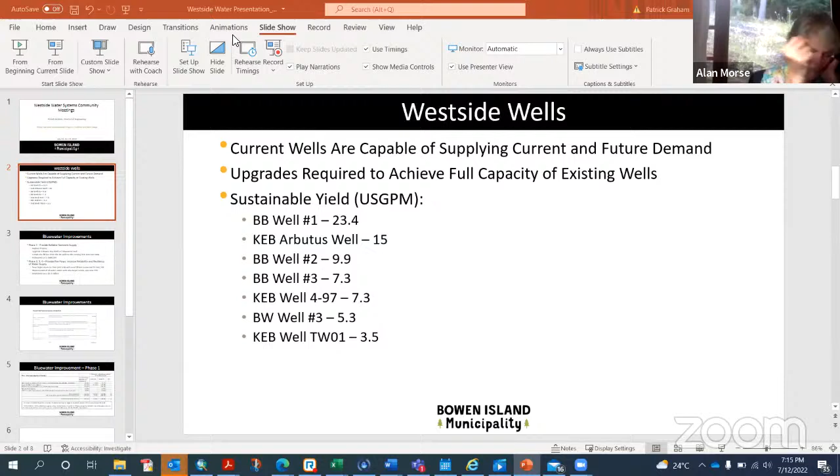You're still on mute, Patrick. Now. Okay, good.

So this is intended to summarize the water systems improvement project, to provide an update on where we're at and what the next steps are. So we have done some assessment of the aquifers on the west side and the water systems, and a lot of that's been discussed and presented with this group already. A key conclusion is that the current wells we have are capable of supplying current and future demand. Upgrades are required to achieve the full capacity of the existing wells.

So the scenario that we've looked at would use essentially the best wells throughout the Bowen Bay, King Edward Bay, and Bluewater systems, and have all of those wells pumped to a common reservoir, which would be the existing King Edward Bay reservoir. In future phases, we would get into a new reservoir in Bluewater. There will also be a new reservoir as part of the fourth phase of the Arbutus Ridge development.

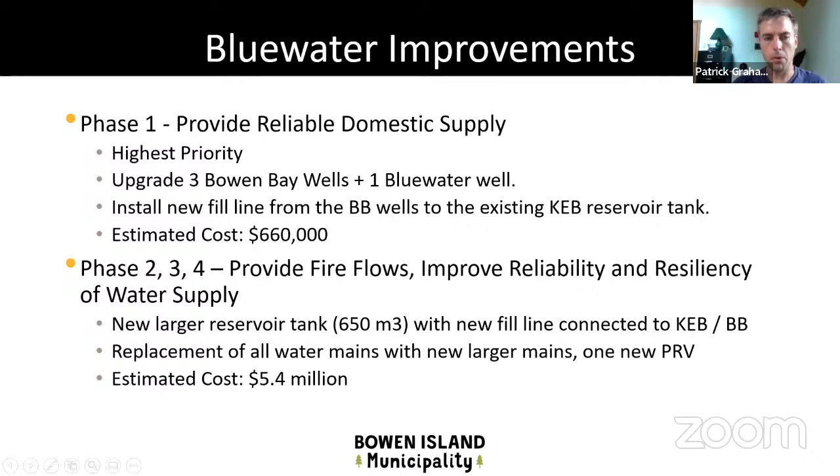So essentially, this is what was presented at the last budget review, the 5-year plan. Things have been escalated because things have been pushed out. We were looking at 2021 cost estimates previously, and now we're looking at 2023. Essentially, the first phase is addressing the domestic supply by upgrading the wells, and then the subsequent phases involve water main replacement and reservoir construction primarily.

Talking about $6 million can be scary for people. Talking about $660,000 is something that we can more easily wrap our heads around, and hopefully get some agreement to borrow the necessary money to proceed with that next year.

The Arbutus Ridge well is one of the better wells, and that coming online has bought us a bit of time. It is intended to cover the full supply requirements for all of the King Edward Bay development area to the east of Windjammer. So as that area gets built out, we need to have new supply addressed before that happens.

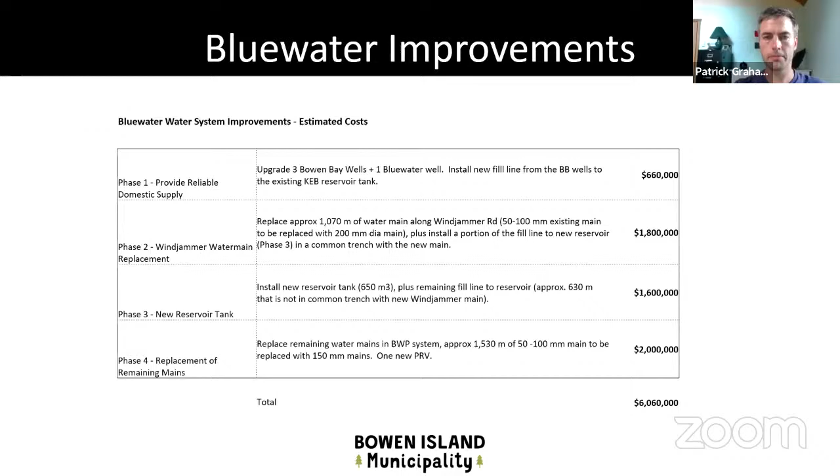And then, we never really got into much discussion about this. We did talk about this during those MOU discussions that we had over the past year. And I think the general agreement was that benefiting parties paying for infrastructure upgrades makes sense. And so essentially this project is driven by the need to address the Bluewater domestic supply gap. And as such, the bulk of that would be paid by the Bluewater system, through borrowing. I assume that the reserves aren't anywhere near enough to cover that.

There is some contribution from the Bowen Bay system, in that we're upgrading their wells. I just took a guess there, in terms of what's the net present value of those assets compared with the net present value as if they were new, right? So they're getting new pumps. They would say, well, we don't need those. Fair enough, but they do have a higher value and that should be captured. But I think the expectation that we've hopefully created previously, and is not a surprise to folks here, is that Bluewater would be covering the bulk of that cost.

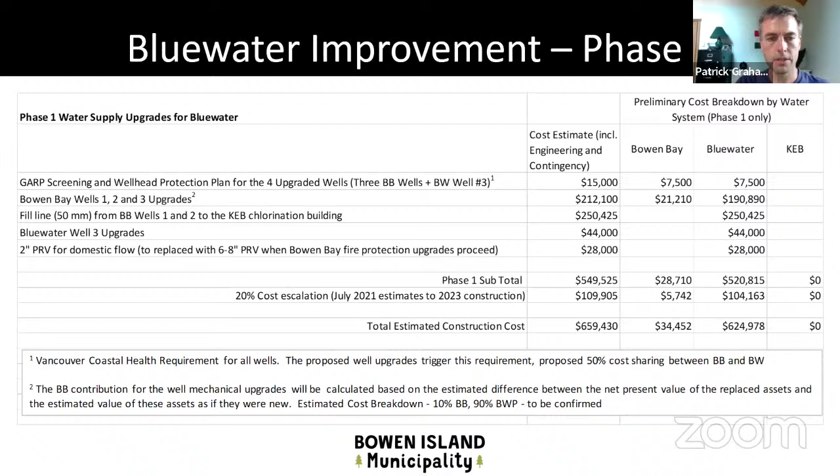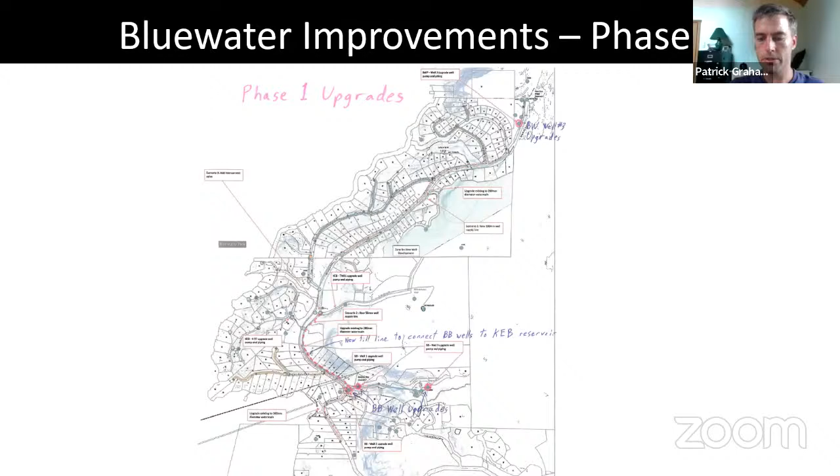And it's not shown on here, but in future there'd be a reservoir up here higher. And then the trick is, in terms of fire protection, getting that water up to the north end of the Bluewater system, and in future phases a new reservoir up here is the other recommended approach. So that's really the focus of what we'd like to get some agreement and approval to move forward with next year and to put in the budget for next year. Obviously we have to talk about financing options, but that would be my primary objective. I think ideally we would have a MOU in place. If we don't, we don't. I don't see that as being a showstopper to moving forward.

Yeah, so it's essentially well upgrades, and then phase two. Oh, sorry, this is Bowen Bay. Just to give a perspective on other system requirements, it's essentially operated as one system in the scenario I'm describing. So they would have the well upgrades we've already talked about, and then essentially they need to replace all of their water mains with larger mains in order to realize the benefit of fire protection that would come from being connected to the King Edward Bay Reservoir. If they're supplied from the King Edward Bay Reservoir, then they're not needing a new reservoir.

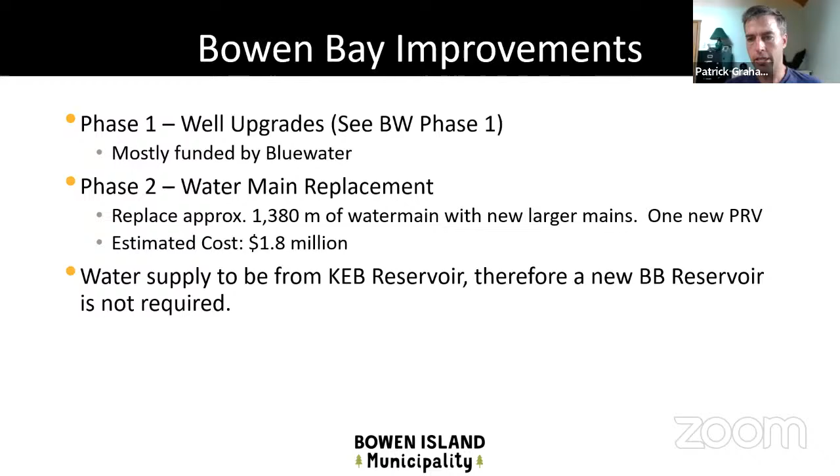Patrick, it looks like Jonathan's got a question. Oh, yeah, sorry. Jonathan? I don't know if it's appropriate now, but I'm not understanding, like, we've got lots of water now. I'm from Bluewater. We've been going fine for the last 15 years since we've hooked up with King Edward Bay. So why does there seem to be a need for all these upgrades? Our supply seems to be fine in the summer. We're talking 3 months in the summer, right? And it's been fine for 15 years. It's been fine.

I think there's been supply issues. No, there hasn't. There was an issue a couple of years ago. There was a big leak. That was the issue that 1 year. Up till then, there hasn't been. I've lived here for a long time, so I know exactly whether there's been a supply issue or not. So I'm sorry, I don't understand the idea of spending all this money for supply, when we seem to be going along fine, and now it's probably going to be better with this new Arbutus Ridge well.

Okay, well, I don't think that's the message we were getting from the LAC members that are representing this community. They've expressed pretty clearly throughout our meetings that they are very concerned about supply. And the King Edward Bay. So I mean, essentially the supply has been keeping up because you're getting most of your water from King Edward Bay.

Perfect. Okay, thanks. So I will speak first a little bit about consumption, and then I'll go into water rates a little bit. So my analysis focused on the metered consumption as measured last summer. So last summer, in 2021, average daily summer household consumption was 96 gallons per household per day. And for an average household, we use a figure of about 2.5 persons per household. So that means that on average, per person use in Bluewater is about 38.4 imperial gallons per day.

And when you compare that against the provincial average, the average for most people across the province in BC is about 69 imperial gallons per day. And I took that data from the BC Municipal Water Survey that was taken in 2016 and undertaken by UBC.

How does that compare to other Bowen Island communities? I've only been working so far on the 3 west side. I can give you the information for the other west side. Be curious. Yeah, I will. I'll have to print out my other presentation. Sure, I can get it for you, Kristen. King Edward Bay is 104 per household, and Bowen Bay is 116 per household. So take those numbers, divide by 2.5 to get to the per person average. So I've just done the 3. I haven't quite done any analysis of the remaining water systems on the east side yet. You're going to have to watch the next 2 days worth of presentations, Kristen, to get the rest of the information. No, the other systems, the Eagle Cliff and Cove Bay. Yeah, no, I'm not there yet.

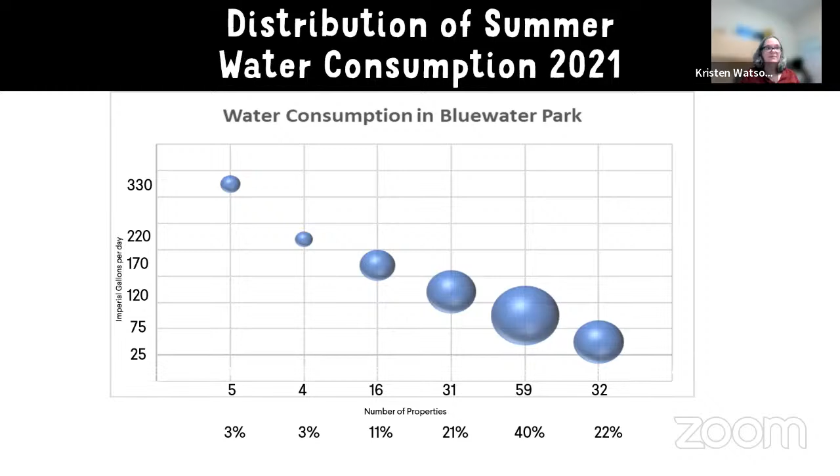So on average, a person in Bluewater is using about 55% of the provincial daily per capita use. So I think it's fair for us to say that residents in Bluewater are extremely careful when it comes to water use. And to show you on a distribution what that looks like, we have about 5 properties that are using around 330 imperial gallons per day. There are 4 homes that are using about 220 gallons per day. 16 are using about 170 per day. 31 are using about 120 per day. And by far the biggest number of homes are consuming about that 75 gallons per day number. And then we have about 32 properties that are consuming about 25 gallons per day. So very low usage on that one.

And the user rate across the 3 districts, we have a unified rate. It's the same rate that is being charged to Bowen Bay, King Edward Bay, and Bluewater Park systems. It says that it's a metered rate system, but because the flat rate allocation is so generous, most properties are using well below that threshold. So most people are paying a flat rate of $960 per year, and that gives them an allotment of 7,200 gallons per month. That equates to 240 gallons per day. In 2021, there were 6 properties that used in excess of that 240 gallon per day number, and they incurred metered rate charges. So 4% of all of the revenue was collected through the metered rates, and 96% of the revenue came from the flat rates.

So in total, we collected 151,547, and that figure was shared among all of the connected properties equally. And 6,827 was paid by the highest 6 users. So you can really see the bulk of the revenue is just distributed equally among each property through a flat rate system. And effectively, the current rate structure impacts everyone: those who use the least are subsidizing those who use the most. We believe that conservation principles should be embedded into the rate structure. So we've devised a new rate structure that will achieve fairness and equity, and at the same time promote conservation of the resource.

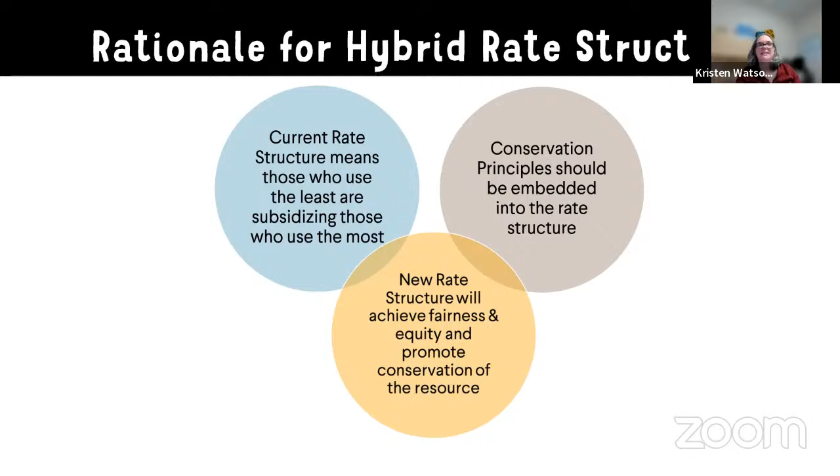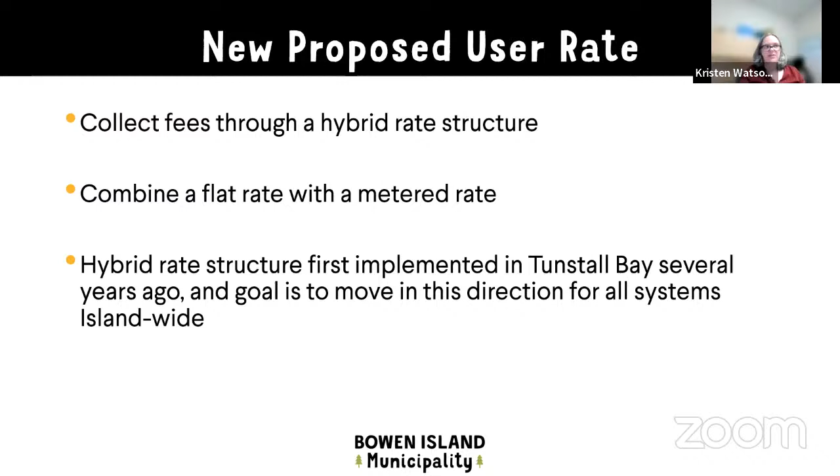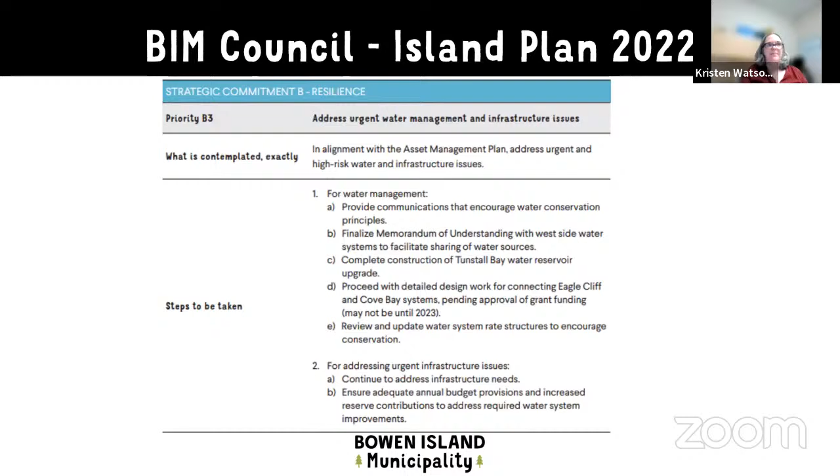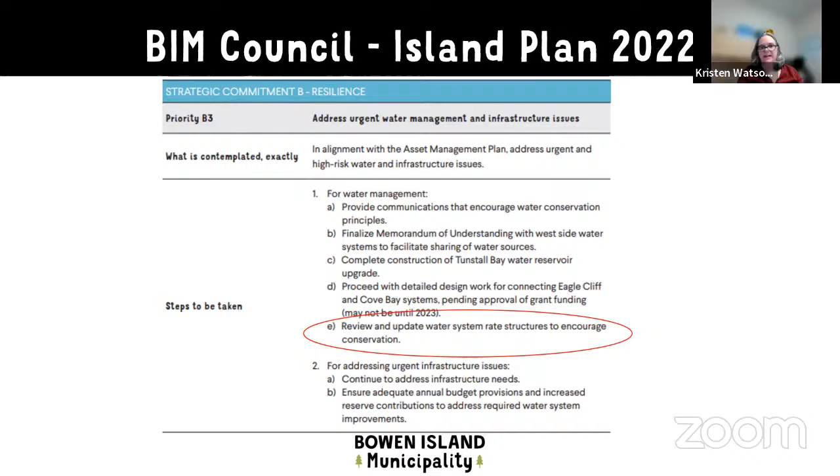We propose that we collect fees through a new hybrid rate structure. We'd like to combine a true flat rate with a true metered rate. And we've moved to this model in Tunstall Bay. It's a hybrid rate structure. It's been there for several years now. And our goal is to move in this direction for all systems island-wide. We're doing this to achieve fairness through an equitable collection of fees from all users, shifting it to a user pay principle to encourage water conservation, and align at the same time with council's strategic priorities. Council has identified their strategic priorities in their island plan. And specifically, they have directed staff to review and update water system rate structures, which will encourage conservation.

So this proposed rate that we've developed is a flat rate of $175 per quarter, and then start charging metered rates for every gallon of water used. So we would get rid of that initial allotment. And up to 4,500 gallons would be charged at ½ cent per gallon.

The next 2,500, and that's consumption around the range of between 50 and 76 gallons per day, would be charged at 0.0075 per gallon. The following 2,000 gallons, and that's for a range between 77 to 99 gallons per day, at 1.25 cents per gallon. And anything over 9,000, equating to about 100 gallons per day, would be charged at 2 cents per gallon.

And again, just to remind you that in Bluewater, the average household is consuming at about 96 gallons per day, and that's in the summer. And we expect that that summer usage is probably the highest at any point in the year. So we do anticipate that we would continue to do monthly meter readings throughout the summer to identify potential leaks. We would continue our practice of notifying all of the high water usage to any residents to enable us to pick up leaks and identify suspected leaks.

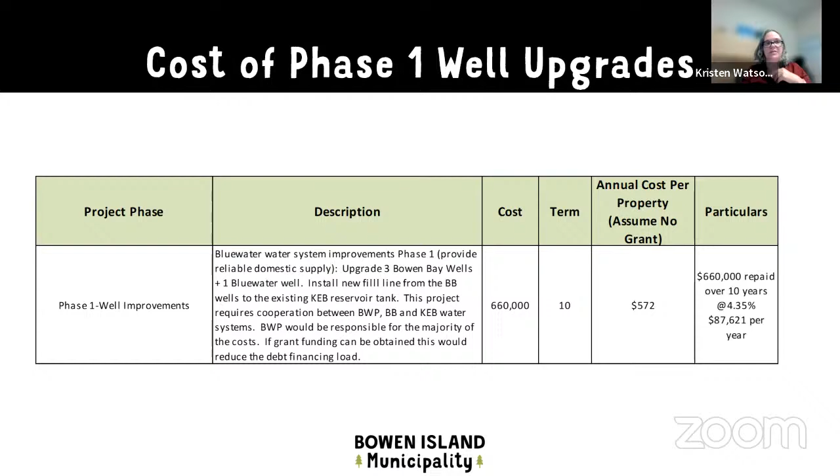The balance of the project we know is the water main replacement and upgrades and reservoir. And as Patrick indicated, the cost for that would be in the order of magnitude of just over $5 million. And there are several different annual costs to finance those amounts if they were borrowed. I assumed a term of 30 years for each of those, and they range from about $693 to $866 for the cost of financing a capital project with that price tag.

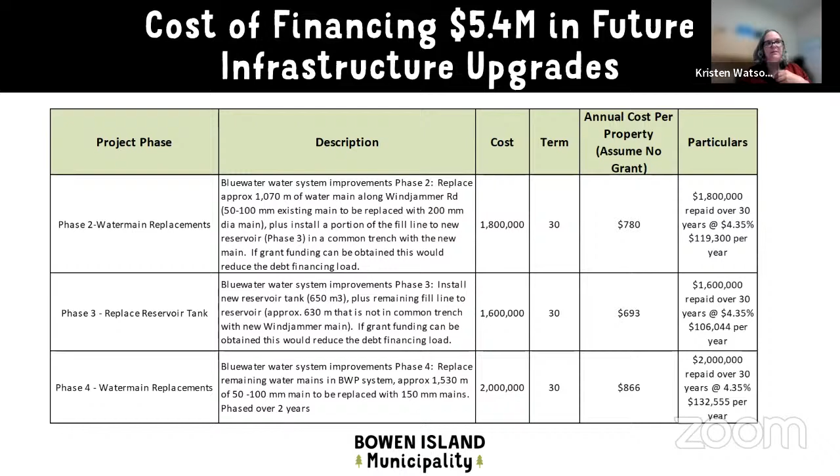So without grant financing, we know that this cost is going to be very high. And tonight we are looking for feedback from the community to inform what decisions should be made about moving forward with these projects. Specifically, what are the community's priorities? Is it safe potable drinking water? Is there a priority for fire protection? That is going to need to be communicated from the community members themselves.

I'd specifically like some feedback from the community about the plan for consumption-based billing, and also about the timing if we're going to implement this new rate structure. We do have some opportunities to implement a metered rate partway through this year, or we could say we're going to do it as of January 1st. I'd like to hear what people in the community think about that.

So please provide us with some feedback on those things. Attend a meeting, email Patrick, Annette, or myself directly, or email Mayor and Council directly. And sorry, I duplicated a slide. Please copy the Bluewater Park LAC on all email correspondence. So that's it for me. I'll stop sharing. Thank you, Kristen. Thank you. Does anyone have questions for Kristen?